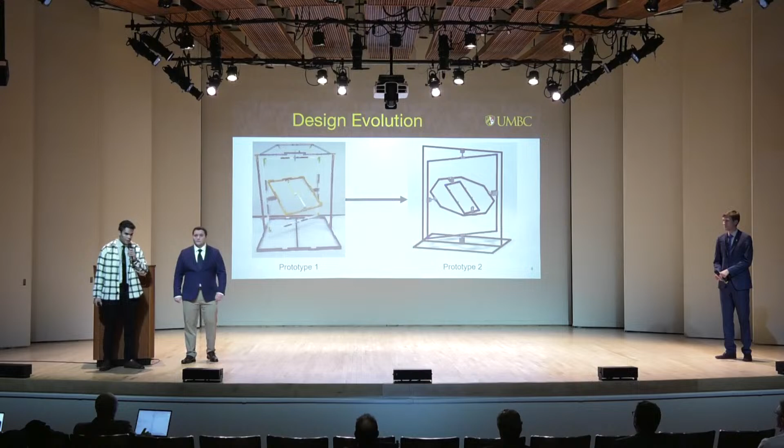Thank you, Jacob. So with this prototype 2, we then needed to run some analysis. We first wanted to understand how the motors on the quadcopter and the vibration induced by them would affect the structure. So we ran a modal analysis on a simplified model of prototype 2, simplified because without the simplifications, the program would just crash because 3 moving axes is not going to be able to work on our hardware.

We then ran a deflection analysis where we assumed that the quadcopter is perpendicular to the ground and powered at 100% thrust. There are 2 connection points to this quadcopter in the structure, and for that reason, the force is going to be distributed across those 2 points, so it's equivalent to 2 of the motors operating at 100% thrust at the top of the structure. And because of that, you see the arrows on the left 2 images. That is where we applied a load, and we ran this analysis for no support, half support, and full supports, and the images on the left are for no supports and full supports.

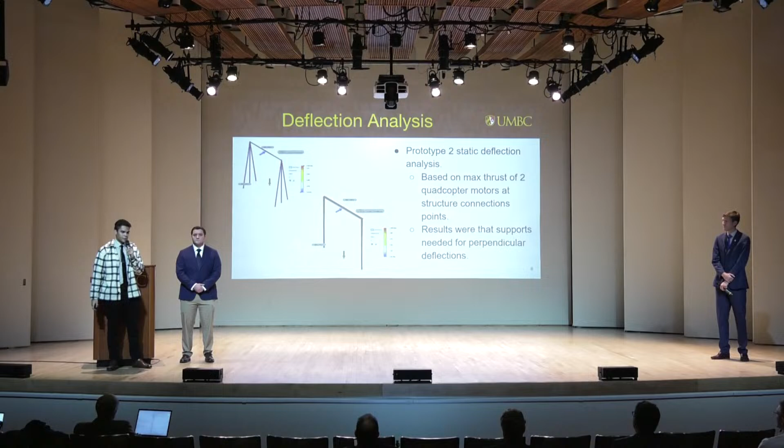So our final design consists of 3 rotating rings and an outer structure. That inner rectangular ring has 4 clamps attached to it so that we can clip the quadcopter into place for testing. That middle ring has an octagonal design in order to minimize the footprint of our device. There's also 2 interfaces between each of the rings and between the outer ring and the overall structure. So we also implemented our analysis that we did on prototype 2 by adding supports onto the structure in order to minimize deflection at the top of our device.

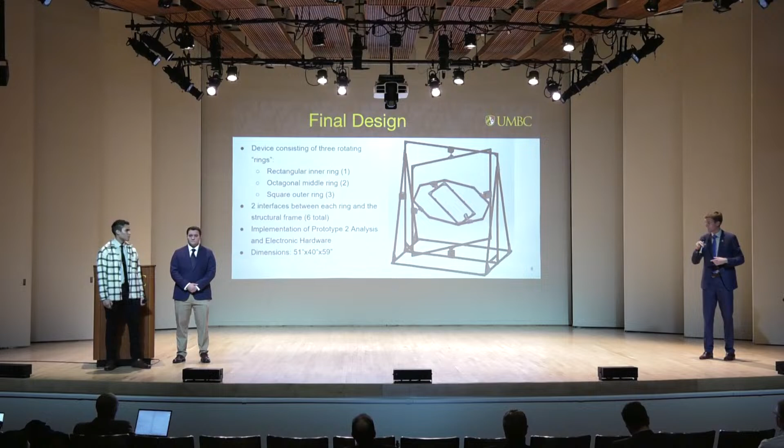And that's just creating a program that takes the encoder readings and feeds them into MATLAB to be displayed in real time. So far, we've manually maneuvered the rings in order to ensure that there's no obstructions to their rotation, also to ensure that they rotate easily and smoothly. And in the future, we plan on recording the time it takes for a user to both mount and dismount the quadcopter from our device.

So for the electronics, the big challenge faced was that Dr. Goel wanted this device to be able to spin in 360 degrees on all axes, which meant that cables were not an option, so we had to pick a slip ring. Dr. Goel has had some negative experiences with slip rings that are on the cheaper side, less than several $1,000s, in the past, so he wanted us to pick a few that were available at a budget and then run tests on them to figure out if they were going to meet the specification required. So we picked a few, tested them, and then picked the best one. It's worth noting that the one we picked performed the best, but also had gold plates on all of the contact surfaces, which is known to be good for longevity.

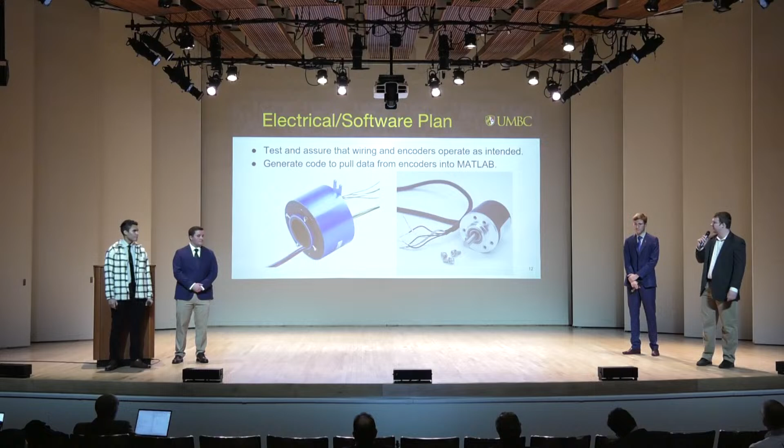Then in October, we started working on CAD models and doing prototypes like the first prototype you've seen, and really figuring out, okay, what exactly is this going to take? And then as November rolled around, we're ordering parts, we're testing parts, and we're starting to print and manufacture things. And then in the late parts of December, we're finishing manufacturing, doing all the wiring, and we're currently in the process of finishing up the software and writing all the documentation that will go along with the use of this actual device. Now we'll open up the floor to any questions.

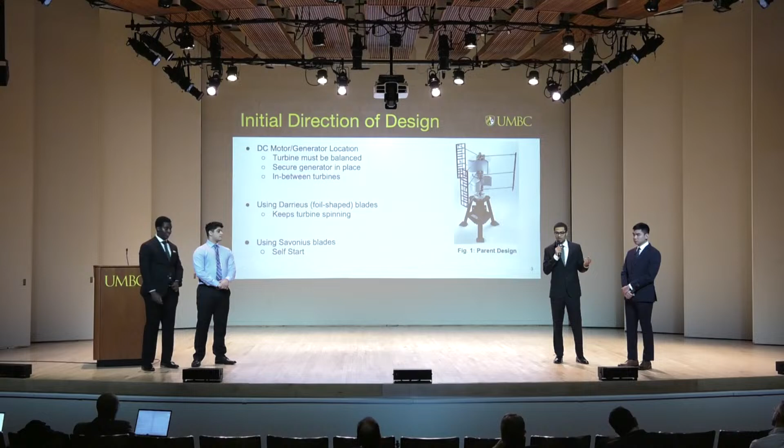So this model we're looking at here is of a previous semester's group project progress. We treated it as our visual reference because it has parts such as a Darrieus blade, which is airfoil shaped. It will keep the rotors flowing easily through the air, and Savonius blades as well that would help the system get self-started because of its cupping shape, as well as a motor that will be right between the rotors here, not only to generate, but also it will keep the full system in balance, being secured in place.

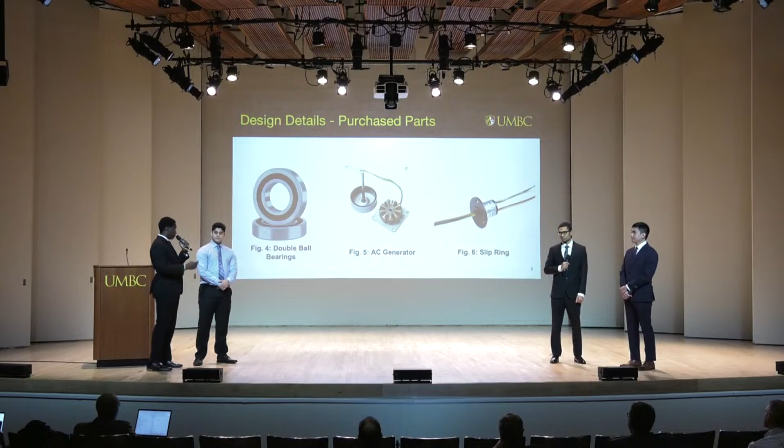other. And the theory behind this is that, according to Faraday's law, the change in magnetic flux over time, an increase in the change of magnetic flux, creates an increase in voltage. So as the rotor spins against the stator, the magnetic flux is increasing, and it's increasing the voltage. This gives us an advantage over just regular generators that have a stationary stator and a rotating rotor.

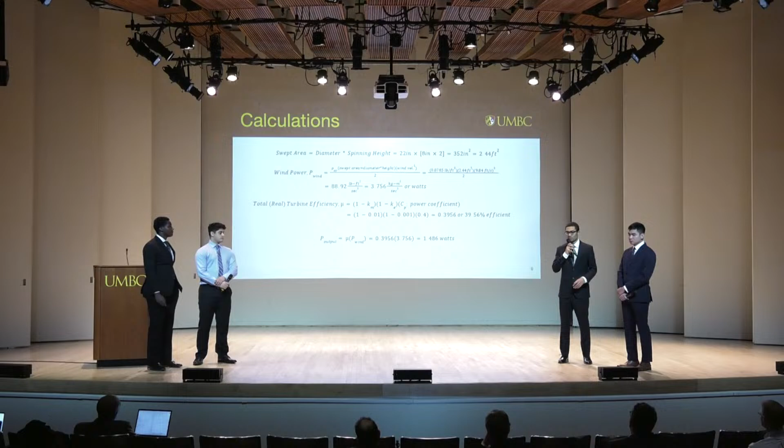With a power generated of 1.5 watts and 9.262 volts at minimum, we conducted that through a series of equations used in the next slide, where first we had to determine the swept area of our turbine as it spins, and then from there calculated the power of the wind. Separately, calculating our efficiency of 39%, which is in the range of wind turbines between 30 to 40% efficiency, and then using both to calculate for an output of 1.48 watts, rounded to 1.5 watts.

We ran simulations and analyses on our system to make sure that our parts did not fail when the system was in use. Considering most of our system is made up of 3D printed parts, once we created all of our parts, we made sure that the parts were compatible with each other, so we made sub-assemblies to make sure that they did the function that they were made to do. And with all these sub-assemblies, we created a complete system and then started testing our complete system.

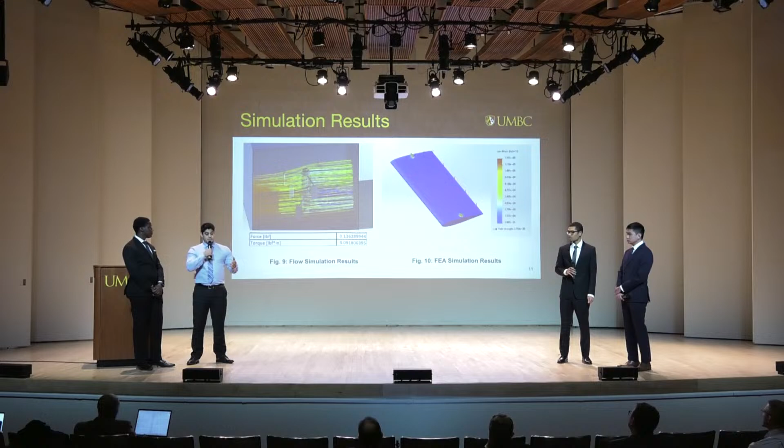We tested our system with a physical fan wall and a wind simulator in SolidWorks at a wind speed of 3 meters per second, and the voltage was recorded by using a multimeter. We also connected the wires of the system to an oscilloscope to measure the voltage versus time, and the rotational speed of the rotors about the shaft was also recorded by using a tachometer.

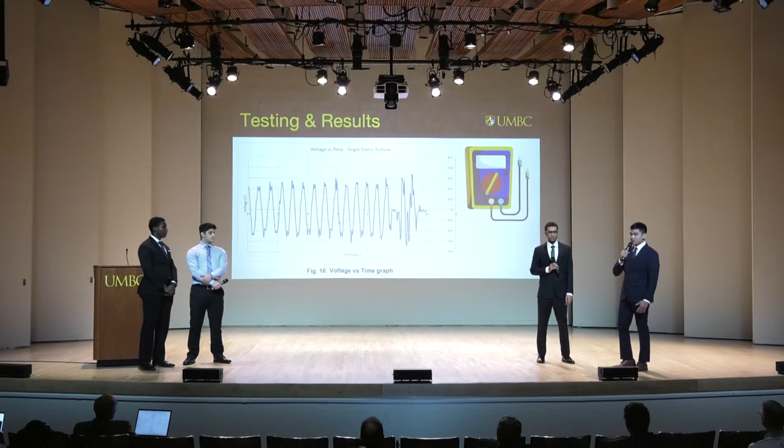Over here is a graph showing the voltage versus time that we sketched based on the data recorded from the oscilloscope. As you can see, the peak voltage is about 0.3 volt, which is much lower than expected, since our system is not fully functioning due to the wobble of the system and friction. However, we're still in the process of revising and testing.

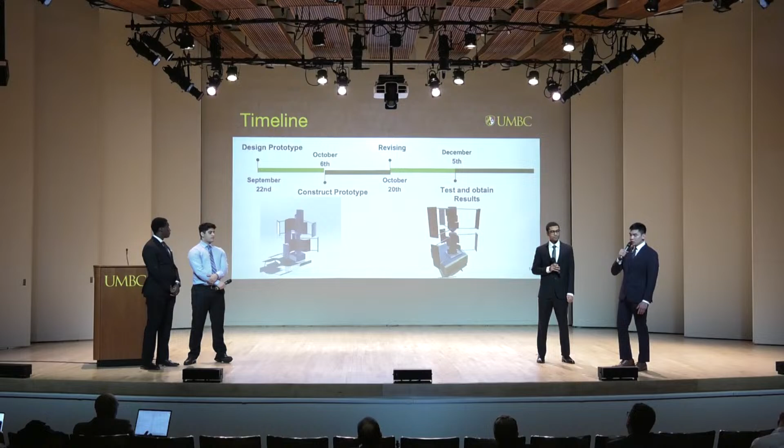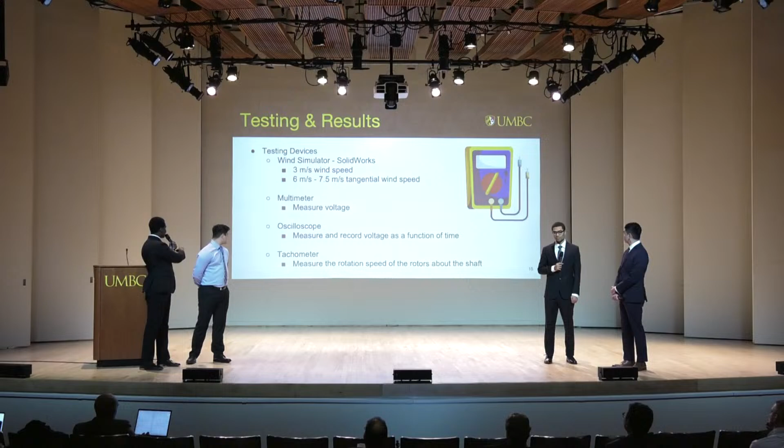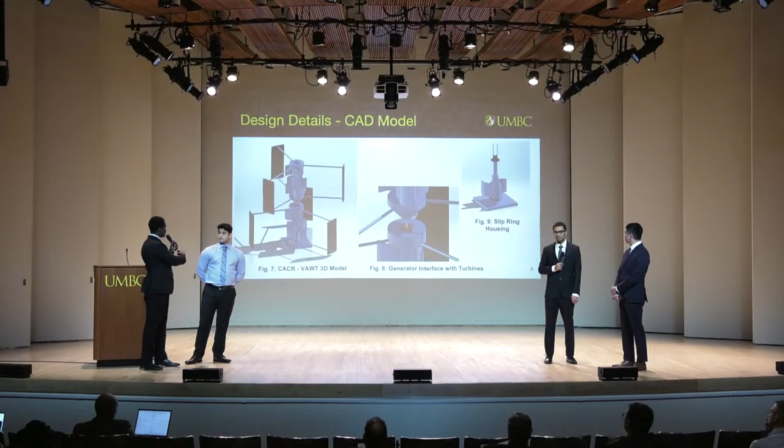The top half counter-rotating against the bottom half versus having everything rotate together. What was the purpose for that design decision? So as the top half, as shown in the motion study, counter-rotates against the bottom half, the magnetic flux of the generator is increasing, and that's supposed to create more voltage compared to if the whole thing is spinning.

Just the stator would be stationary and the rotor spinning. But now if they're spinning relative to each other, there's more voltage created. Basically, you're getting twice the RPM without a gearbox. Exactly. Yes. Okay.

And is the top half supported entirely by the motor shaft, or is there anything else supporting the top half of the structure there? So yes, initially the top half was just solely supported by that, but we found that the motor that we got, the shaft was too small, so we built an external stand that attaches to the top of the turbine and holds that part in place.

Okay, thanks. So let me ask a little bit about some of your experimental results and how they may have matched up with your modeling. You had mentioned, I think, that there was some friction and maybe some other error sources that may not have given you a good comparison. Could you allude a little more to some of those details besides just friction?

Got it. So as I said earlier, there was initially wobble due to the top turbine being solely supported by that. And because of this, when the wind hits it, the whole system is tipping back and forth. And we also found that we printed the base at the beginning of our conceptualization, and over time it started to warp. So that also caused an increase in the wobble because the ball bearing was not spinning freely and it was hitting part of the base.

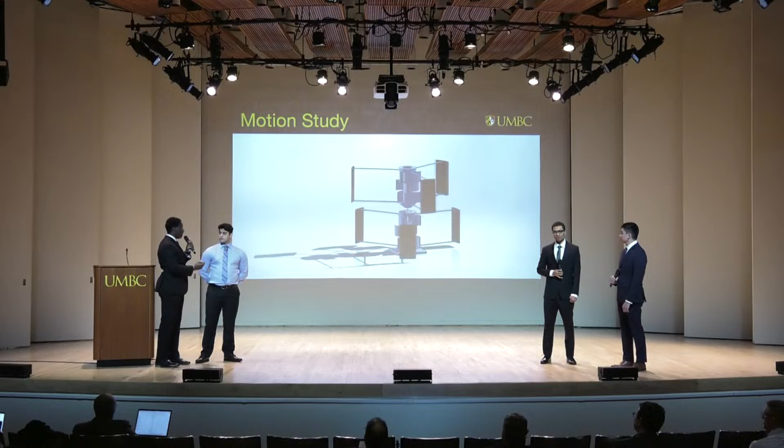So from a mechanical aspect, what would you do differently given more time and or resources? So we would get an output shaft that's much bigger that could better support the top turbine, and we were also creating that external fixture to help keep the top turbine from wobbling. We actually recently finished that, and it improved it a lot. For the base, we would not use the material that we used, which is PLA plus, because of warping, but get something more stable, such as wood, to keep it uniform and flat.

And to add to that, we wish we were able to make the radius or diameter of the Savonius blade a little bit bigger, so it can catch more wind when the wind hits the system.

All right, congratulations on your last presentation. And yeah, you can actually put this over there. All right. All right, our next team, softball. Come on out. And I think your client is here. There he is. I have an extra mic over here. Yeah, we're ready. All right.

Good morning, everyone. Welcome to our final presentation. We are Group 3, Catch and Return. I am Kyle Naughton. This is Thomas Yost, Jacob Moran, and Azana McQuanant. Our client is Assistant Athletic Director Kevin Gibbons O'Neill. He has tasked us with creating a device that allows the pitcher to practice independently from the rest of the team for the UMBC softball team. He has given us a used Pitcher Pocket Pro device to implement in our final design.

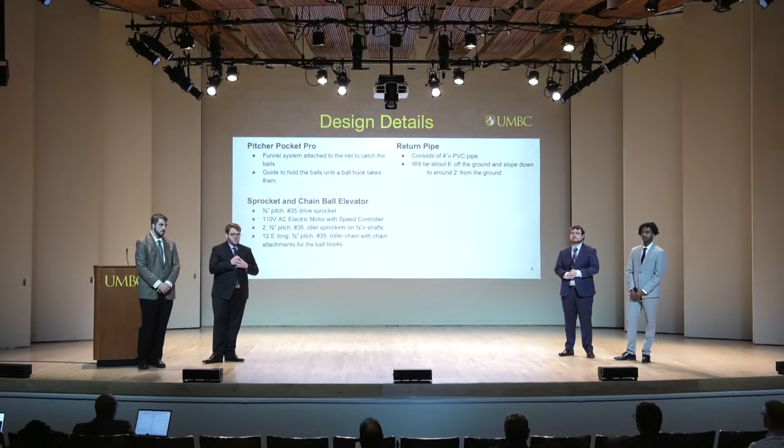We then wanted to reduce the number of moving parts, and so we considered an Archimedes screw design. We were advised that this might be a little bit more trouble than it was worth, but we still designed out the full CAD model, and we heeded that advice when it came time to prototyping. We designed a third propulsion system to get that ball up, which was an air propulsion system. It worked very well at the small scale, but when talking with the client, we found out quickly that the noise pollution of the air propulsion system would be too great when we scaled it up to the size of the softball. We moved away from air propulsion.

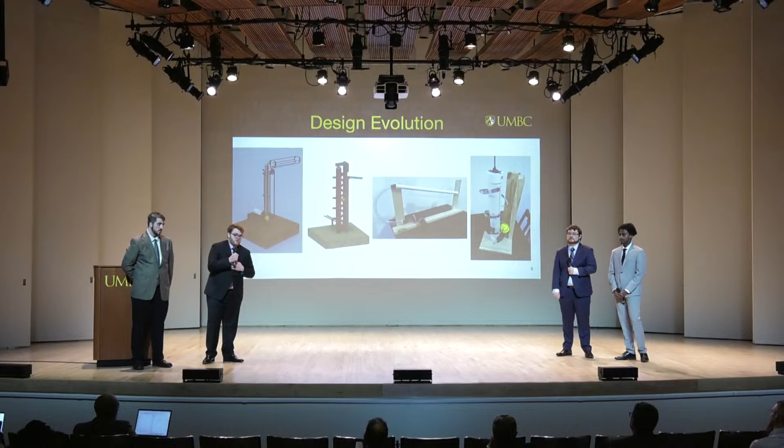We then went back to the CAD model of the Archimedes screw. We prototyped one out fully, and we ran into some trouble there. Two main issues are that the softball has a very high grip. It's designed that way to be caught and thrown. And in addition, the laces on the ball make it so that it's not perfectly spherical. These two factors make it so that a softball is almost the perfect object to jam an Archimedes screw ball lift device. Therefore, we moved back towards another design.

So for our fabrication, we currently have the ball funnel completed. We made it out of plywood and wood fasteners so that it would be very lightweight, because the Pitcher Pocket Pro is already fairly heavy. We wanted to make sure that they could move it in a timely manner. We also have the ball elevator partially completed. We have the main components of it done. We have the chain in place. We have the motor secured, and all the framing is done.

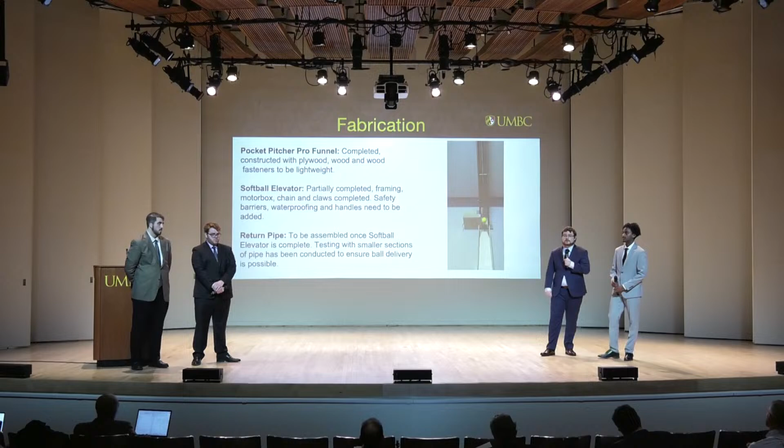Next, for our project, we had to make sure that testing was done after fabrication was completed. We wanted to make sure that the functional, performance, and safety requirements were all checked off. For our funnel system, we wanted to make sure that the ramp slope was appropriate and led to the appropriate place for the ball so that it could be picked up by the ball elevator. To do this, we simply tested how multiple balls would interact with that, roll down and sit in the appropriate location, and made adjustments as we went along.

For our ball elevator, we had to make sure it was able to lift it to the appropriate height. To test this, we simply let the system run at first and see how the balls would interact with it and made adjustments to the chain strength and slack to make sure it was able to lift it up. Basically, we saw how that worked at first and then saw how it interacted with the funnel, seeing that the ball was able to be scooped up and dropped off into the return chute, which was appropriate. We wanted to make sure that our motor was also able to shut off if necessary at any time, so we had to test a shut-off switch.

And then lastly, for our timeline, we thought of our initial concept in the beginning of October. Next, we completed prototyping in the beginning of November, and a week later, we decided on our final design. Going forward, we're going to finish the assembly on Monday, the 11th, finish testing and making adjustments on the 13th, and have our final client demo on the 15th. Thank you. Any questions?

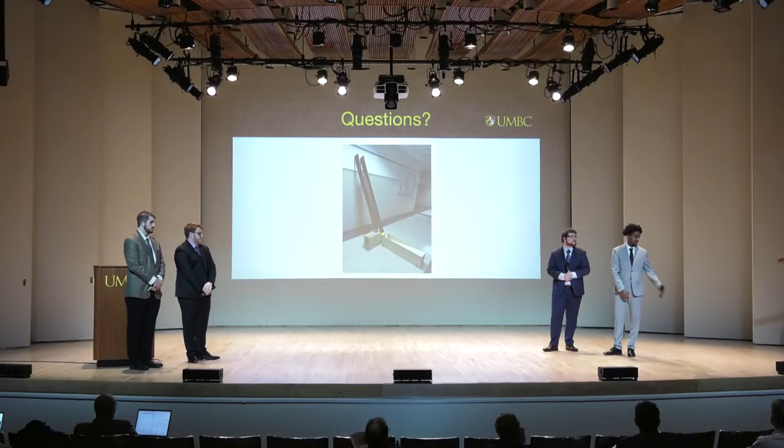Congratulations on your last presentation. Can we give him a round of applause? All right, and our next team, you want to come on out, which is our Baltimore Gas and Electric group. And I have a microphone over here. And please make sure, again, you hold your mic to your mouth.

All right, good morning, everybody. This is our presentation on our copper pipe removal tool. I'm Brandon, this is John. On your left is Daniel, and on the right is Andrew. And we've been working with BGE's gas division.

So right into the background, basically in the mid to late 1800s, BGE started burying steel gas lines in the ground to deliver natural gas to homes. And what happens when you bury unprotected steel in the ground is it starts to rust away and corrode. So in order to keep these lines in service, inside of the larger steel pipe, they inserted smaller copper pipe as liners to keep them in service.

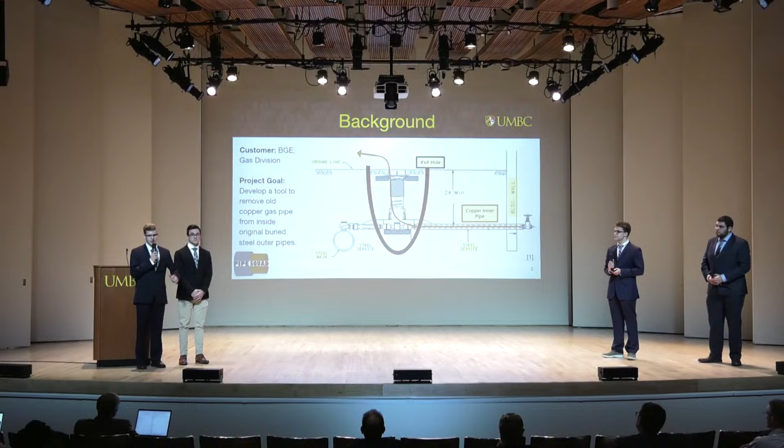And basically the problem that they're having now is that they would like to remove these copper pipes and reinstall plastic liners instead, but still inside of the steel liner. So what they need to do is find a way to remove the copper pipe while keeping the existing steel pipe in place so that they can reinstall the plastic. And they've been trying to find a tool to do this, and they haven't been able to find one, so that's where we come in.

So some of the system requirements were given to us by BGE, and some of them we came up with ourselves. BGE told us that they wanted this tool to be compatible with the Takeuchi TB240 excavator, which they frequently use for these jobs. They wanted the tool to function without the crew being inside the hole they dug, for safety purposes. We determined that the tool should be able to withstand 5,000 pounds of pulling force because the excavator can theoretically pull up to 4,100 pounds.

And 10,000 pounds of compression force because the cylinder we chose can withstand up to 3,000 psi, which translates to roughly 9,000 pounds of compression force. We wanted the tool to be compact in order to fit within the hole easily, as well as on the trucks. And then we wanted the tool to withstand the wet and muddy conditions that it would be experiencing on job sites. And then lastly, we wanted the tool to be entirely mechanical in order to save cost and make the product simple to maintain.

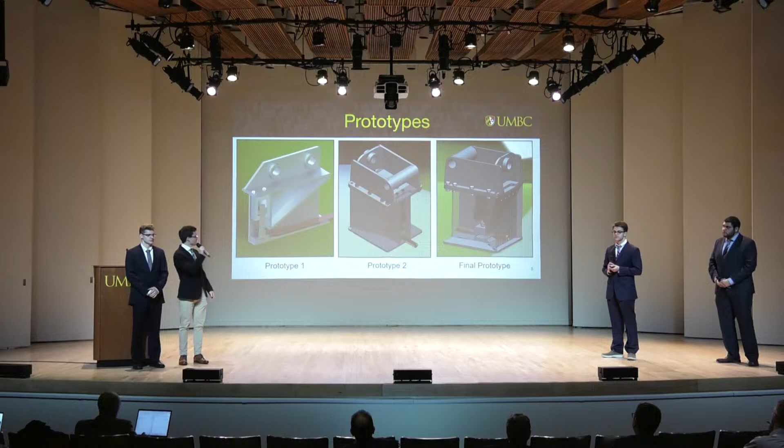So the actual clamping jaws of our tool, we initially had more of a serrated jaw design, but we were concerned about, during compression, shearing the copper itself. So at the recommendation of our professor, Dr. Von Lockett, we went with more of a smooth, wavy design, to limit the chance of shearing the pipe during compression, but also increasing the mechanical coupling rather than just flat blocks of steel. And those jaws are CNC cut out of just standard soft 1018 steel. We didn't feel we needed to harden them because it's substantial, and those are user replaceable, just bolting in.

So moving on to the aspects of safety and also the analysis that we've done with the tool. As we mentioned previously, with the final prototype we added rubber safety flaps at the recommendation of BGE to the front opening where the copper pipe goes in. This is just to make sure that nobody is putting fingers where they're not supposed to go. We also did a finite element analysis for the frame because, as mentioned earlier, the hydraulic cylinder can exert almost 9,000 pounds of compression on the tool, and also the excavator can pull with about 4,000 pounds. So we just simulated those loads in SolidWorks. This is only for the frame. That's the only part that we looked at for the finite element analysis.

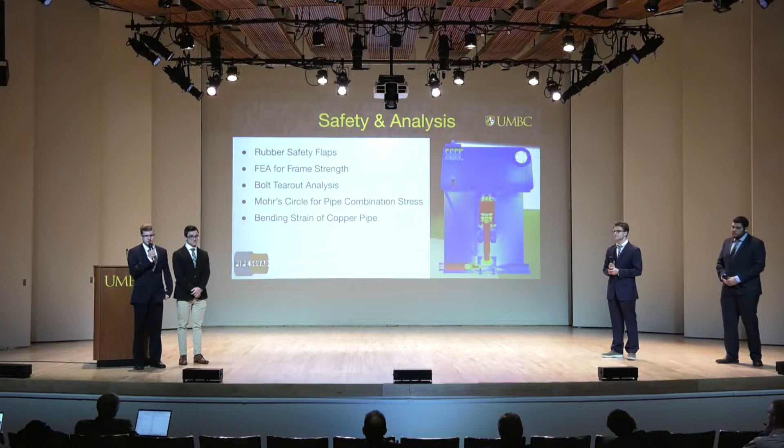The tool's about 2 feet tall and about 1 foot wide, so those plates on the side are pretty flat, and we just wanted to make sure that they were strong enough, and the factor of safety there was well over 5. And then by hand, we did an analysis of the bolts that attach the top mounting bracket to the rest of the frame, just to make sure that those weren't going to damage the steel. For the copper pipe, where it's being compressed in the jaws and the tension is being applied as you pull it out of the ground, we did Mohr's circle on that to make sure it wasn't going to fracture. And then we also looked at the strain on the copper pipe as a result of the wavy jaw design, and all of those calculations checked out, and we're happy with the performance of the tool.

All right, so for the fabrication itself, we were lucky that BG&E had a CNC fiber laser on site, so they were able to very accurately cut out our 3/8 inch plate steel, and we included tab and slots for alignment. They then took the side panels, and they had a big hydraulic press brake, and they bent those into shape, and they got that all slotted together, and then Brian the welder tacked everything up, and then went back with a stick welder to get really good penetration on all the necessary joints.

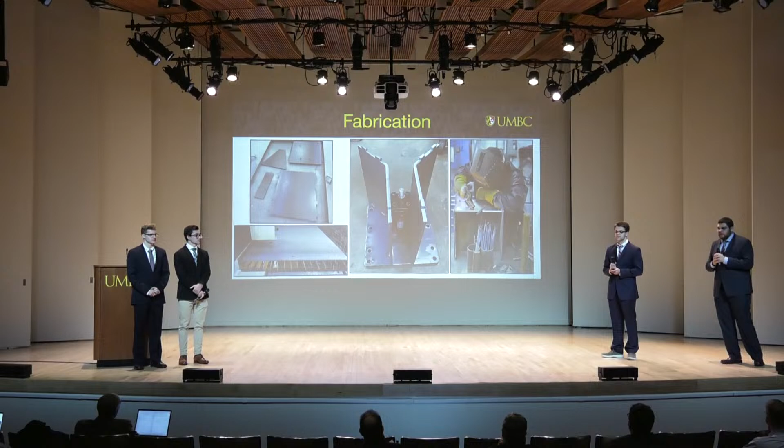So for some quick testing, we haven't done our complete round of testing yet. We actually did this yesterday. This is just some quick performance testing. So we hooked up the tool to the excavator. We wanted to make sure everything was working properly. The hydraulic cylinder works. It was able to compress the pipe. And BGE basically just took a piece of copper pipe and put a bunch of gravel on top of it and parked a big giant dump truck on top to make sure there was some resistance there.

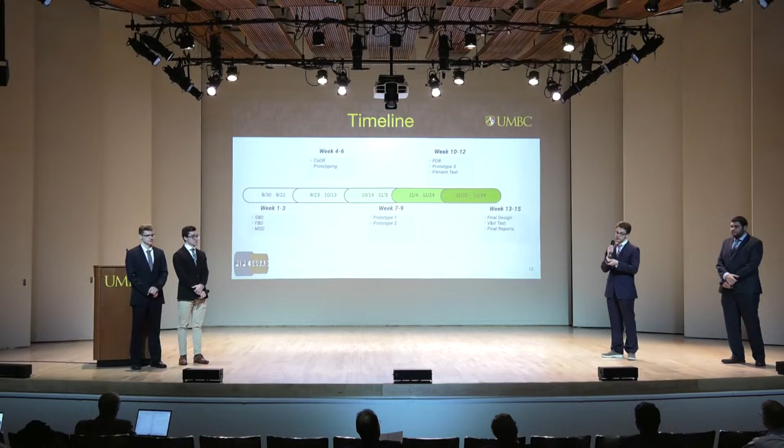Here's a broad overview of our timeline. In the first 3 weeks, we focused on understanding what BGE wanted and how the tool would function. In the second part of our project, we focused on coming up with a conceptual design. We then worked on 2 prototypes, which we presented and got feedback on. We then came up with a final design based on our feedback, and then we've just completed some of our initial testing on it. Thank you all for coming and listening to our presentation.

Does anyone have any questions? Yeah, just any considerations for the maximum length of pipe that you guys can pull out without it interfering with the work going on around it, or ways to redirect the pipe so it is not coming right back at the operator and or interfering with the boom or any of the hydraulics as the length increases? I know you guys said 20 feet, but realistically, is there a maximum that they can do before they have to cut and reset, or is there any considerations for shifting the pipe away from the operator?

Yeah, so the copper, it's not hard copper, it's like a soft coil copper. So they're only gonna pull out maybe like 4 or 5 feet at a time, however much the boom can swing. So they'll do one stroke, and as soon as it gets up towards the cab, another operator outside the hole can just direct it away. It's flexible enough, they can just push it away, and then they can just continue pulling. And then another operator can just coil it up, basically. And if they want to, they can cut it at any point. But yeah, that wasn't really an issue, just because of how flexible the pipe is.

Yeah, so I'll add to that a little bit. When we did the testing yesterday, basically, where the jaws actually crush the copper, at that point, it's very flimsy. You can bend it with your hands. So as they pulled the copper out, a guy just went behind the excavator and basically just folded it over itself into a nice little neat pile. Yeah, like an accordion.

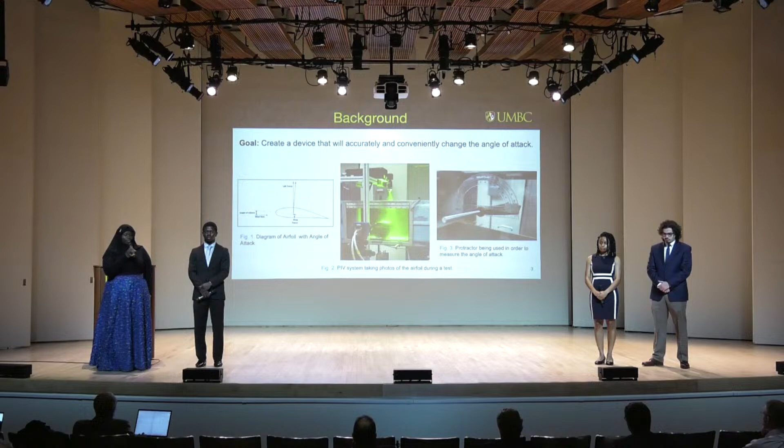Currently, the client is using a protractor to find the best angle per test. However, this leads to a lot of inaccurate measurements and is troublesome for the client. Our goal is to create a device that will accurately and conveniently change the angle of attack. We had many system requirements for this project. However, the most important one is to make sure that the device changes the angle within 0.1 degrees of tolerance.

We adopted an agile methodological approach in which our team started by conceptualizing design ideas. We moved forward by developing upon them through written documentation, sketches, and team working meetings. And once we were able to develop a prototype, we validated the device through operational and functional integrity testing, finishing off with a retrospective or evaluative meeting to ensure that we've met our desired goal.

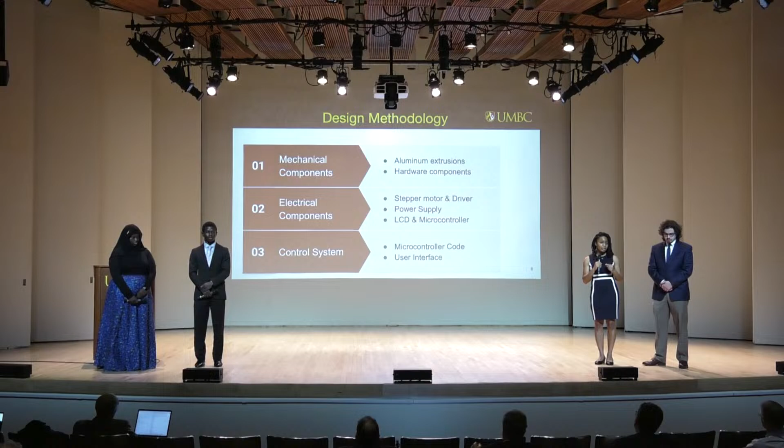We functionally broke down our product production into 3 stages, the first being mechanical components, where we developed the frame and the body of our device, moving to the electrical components, where we utilized evaluative methods to select the electronics for our device, such as the stepper motor and the stepper motor driver, and lastly, the control system, where we evaluated the interconnected aspects and functionality of the electronics, and we developed upon the user interface.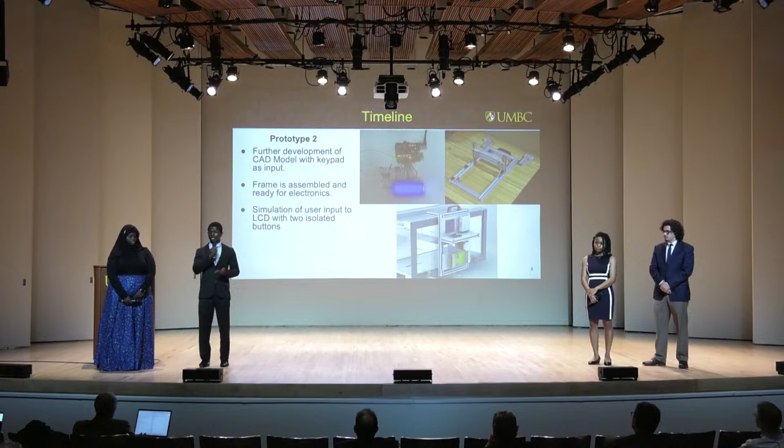From this to what would become the final product, we changed from the keypad and LCD to an LCD shield. Programming was done, as well as the final components being assembled, and then testing was done, which verified that our device was a functional product that satisfied clients' requests.

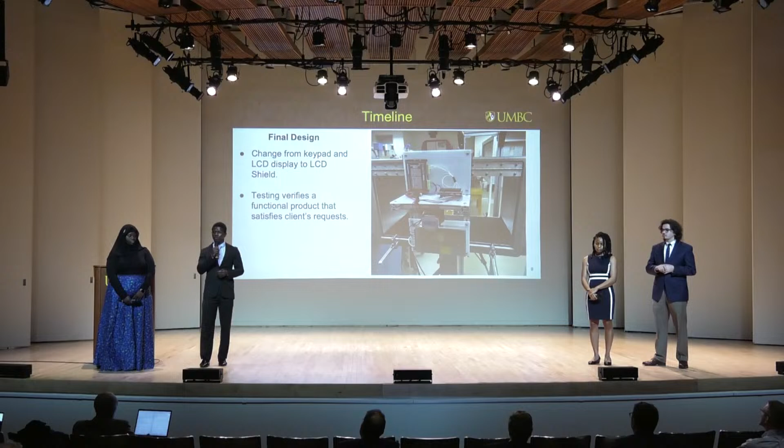Our budget followed the timeline in 3 different phases. Phase 1 included materials for the physical frame. Phase 2 included the electrical components, and Phase 3 for safety and final touches. In total, we spent $467.

Now, from ideation to prototyping and development, we would now like to feature the AeroFlex system, an actuation device capable of moving 1/10 of a degree for accurate testing of the angle of attack of the airfoil within Emily's experiment. Now, with this system, what we have outlined here is essentially just the main components that go into our product.

I do want to highlight a couple of our key features, starting with the NEMA 23 2-phase stepper motor, which we selected due to its ample holding torque that would allow us to hold the airfoil within the wind tunnel during testing, where we've decreased the step angle from 1.8 degrees or 200 pulses per revolution to 25,600 pulses per revolution in order to get as precise as possible to the 0.1 increments that we need for testing.

Here we have our user interface, which we designed to be user-centered and intuitive, in which the user is able to increment and decrement by degrees of 1 and 0.1 simply by selecting those buttons there, toggling between the buttons, and they're able to enter their desired angle of attack.

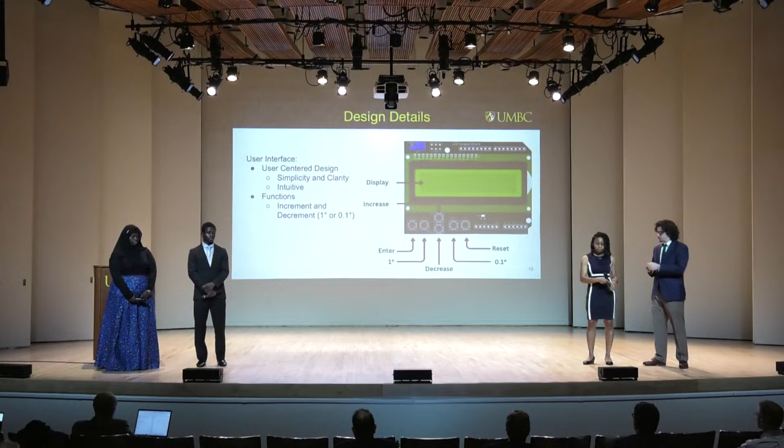So to house all of our electronic components, as well as mount the device to the wind tunnel, we chose to use the 80/20 aluminum T-slot building system. What you can see in the upper left is that aluminum extrusion. We also used various 90-degree brackets from the same company to attach all those extrusions together, and then the miscellaneous hardware required, which was T-slot nuts, machine screws, and washers. Additionally, we had a high-density polyethylene sheet laser cut to size to mount all of the electronic components, which was mounted to the frame.

On the left side, you can see the assembled frame with those aluminum extrusions cut to length using a dry cut chop saw, which allowed the lengths to be very accurate, so the frame was the expected dimensions and fit on the wind tunnel as we expected. Of course, the 80/20 system is adjustable, so if we needed to, we could adjust it to make it fit even better. On the right side, within the red circle, you can see a small aluminum block. What that does is adapt the 4-hole mounting pattern for the toggle clamp to the 2-hole pattern that is needed to mount it to the aluminum extrusion.

So you can see in the upper left image, the HDPE sheets have been mounted to the frame. Once that was done, the electronic component mounting patterns were found in their respective data sheets, drilled in those HDPE sheets, and then the components could be mounted. Once they were all secured and held in place, we then wired them together with strain relief in mind, especially the 120-volt AC power cord that leaves the device. Because the user will be handling that, it moves around a lot, so strain relief is extra important for that one.

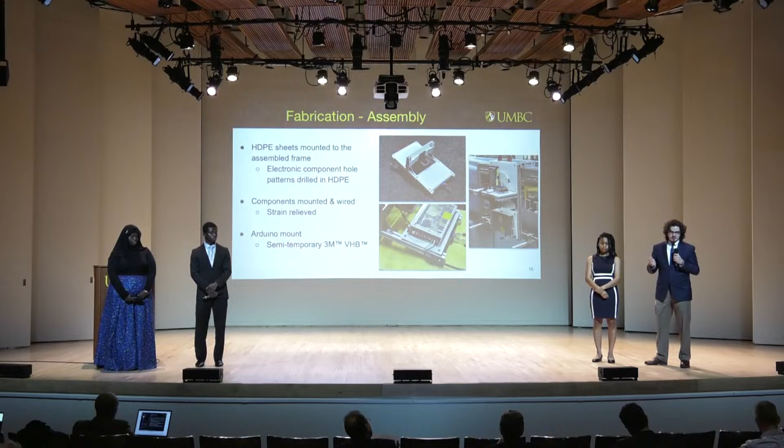Additionally, the Arduino is currently mounted using 3M VHB, which stands for very high bond, so it's very secure right now, but we think we can do better, so we're going to 3D print an enclosure for the Arduino and attach it using hardware.

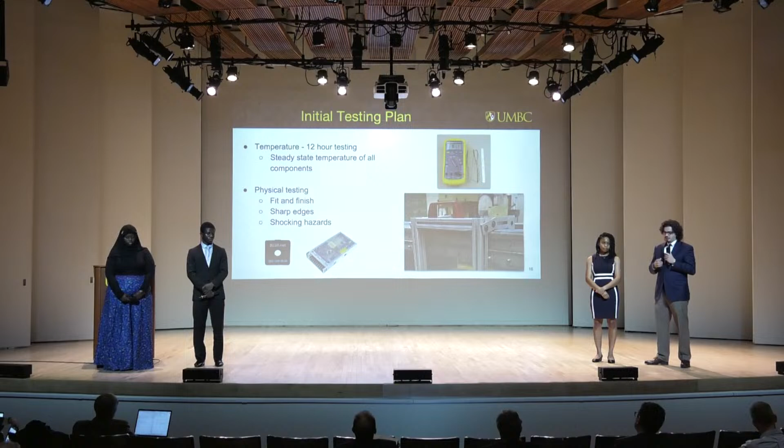So for some of those more basic system requirements, we had an initial testing plan for temperature, which was over a 12-hour period to be sure that any components on the device don't exceed a temperature that we expected when the client is using the device. And then physical testing, of course, fit and finish, making sure it fits on the wind tunnel, sharp edges for safety, and shocking hazards. So the most important system requirement was that precision, 0.1 degrees. That involves some interesting testing. The Imaging Research Center right here on campus helped us do this.

What we did was take some high-resolution images of the airfoil at different angles, starting from 0 degrees, 1/10 of a degree, 1/2 a degree, and then 1 degree. Those images were then loaded into image processing software, where we could take actual measurements of what the airfoil actually did. So the result of that is the motor rotated 0.0991 degrees when we told it to rotate 1/10 of a degree. That's a difference of 9/10,000ths of a degree, or 0.9% error, which is excellent.

And then for those other system requirements, the temperature, we found the stepper motor was the hottest device, and that reached 117 degrees, which is barely above warm, so there's no danger there. Physical testing, it fit very rigid, as you can see in the bottom video there. All the edges were made sure there were no burrs or any sharp edges.

The shocking hazard will need to be addressed because that power supply has some exposed terminals where the 120-volt power cord attaches to it. So to address that, we're just going to 3D print a cover that will cover those terminals. And that's all we have for you. So any questions?

Thank you. I appreciate the consideration for putting together a package like this. You did mention something about your accuracy. And my first question as you were going through this was mounting accuracy. So in other words, how do you know when 0 is 0? There's an increment as you've prescribed, and I know you mentioned there's an error there. I'd like you to offer a reason why there's an error between the increments of what you prescribed and what you actually saw. And then I'm also going to ask about how you can mount it and make sure that 0 is 0.

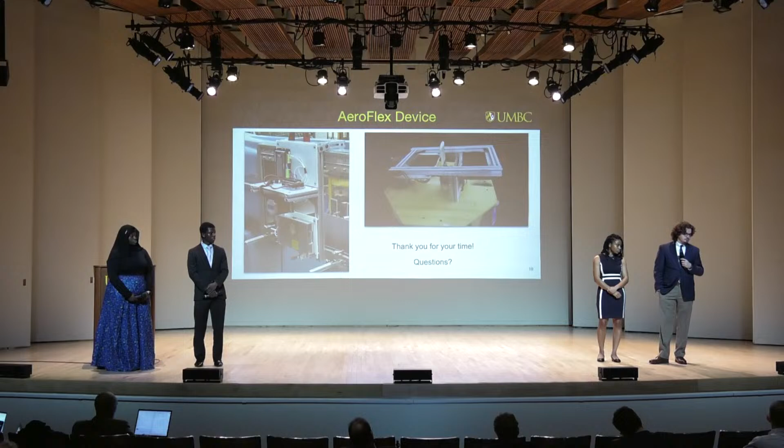How are you securing the airfoil and attaching the airfoil to the stepper motor? And the reason I'm asking that question is, is there any concern over time that that connection could potentially slip, where the motor itself and your measuring device show that the shaft is at 0 degrees, but because of slippage in the connection between the foil and the shaft of the motor, over time the airfoil itself is not at 0 degrees anymore?

That's an excellent question. We actually considered that by using an encoder on the shaft. We didn't do that because it would add an extra level of complexity that we didn't think we needed yet. In the future, we could add that. Right now, the airfoil is on 2 axles out of each end of the airfoil, and on each side of the wind tunnel, there's a plexiglass window with a bushing and a hole in a bushing that the axles go

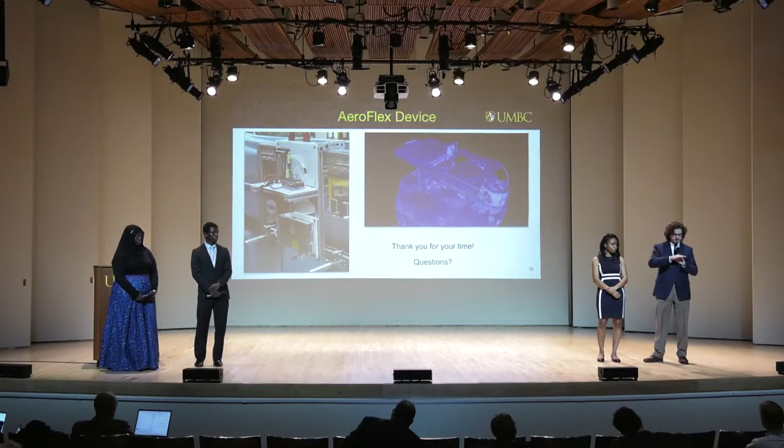through. So that is what's supporting the airfoil, and the only thing the stepper motor is doing is attached to one of those shafts using a shaft coupler. It has a set screw, and it's a D-slot shaft, or it has a flat spot on the shaft that the set screw pushes against, so it's pretty much impossible for it to rotate unexpectedly. Okay.

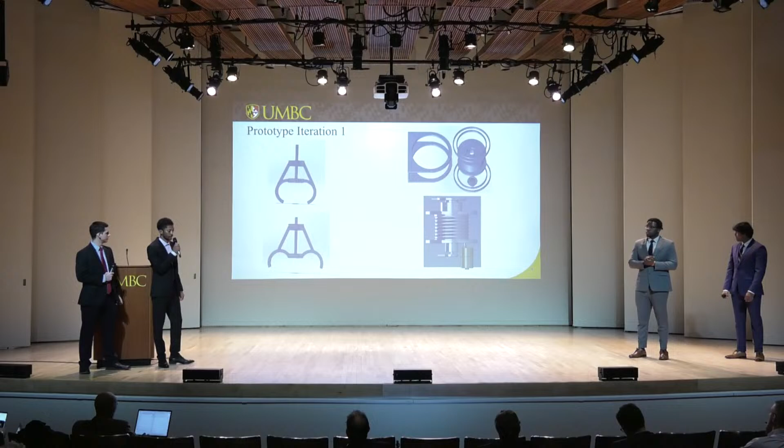For our second prototype, we redesigned the claw to make it simpler and have a pinch mechanism, and it houses a motor on the top connected to a threaded shaft that would open and close the claw, and on the right is an updated winch. What you're seeing here is a 3D printed model of our second prototype for the winch. The purpose of this was to test out the functionality of the 3/8 grooving to house the 3/8 cable.

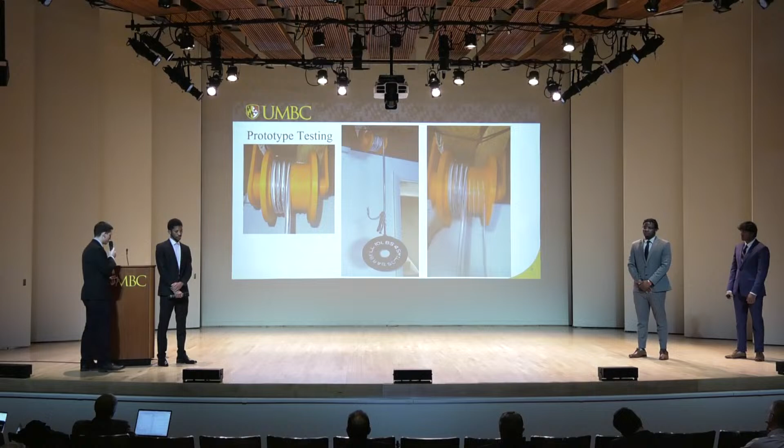As you can see, it's bolted to the ceiling of my basement. It ended up working pretty well. In the middle, we have a 10-pound weight suspended on the cable assembly, demonstrating that it could hold a weight that is almost twice the max weight of the entire assembly. And on the right, we have a video of the cable unspooling.

Here is the final design. We have a DC motor driving gears. The DC motor goes into a gearbox with a worm drive gear, which provides an increase of torque, but also locks the assembly so that the operator can choose how much cable they'd like to have dispensed. In the top right corner is a slip ring, because unlike traditional winches, this is designed to have electrical signals so that you could use an electric claw or have extra attachments.

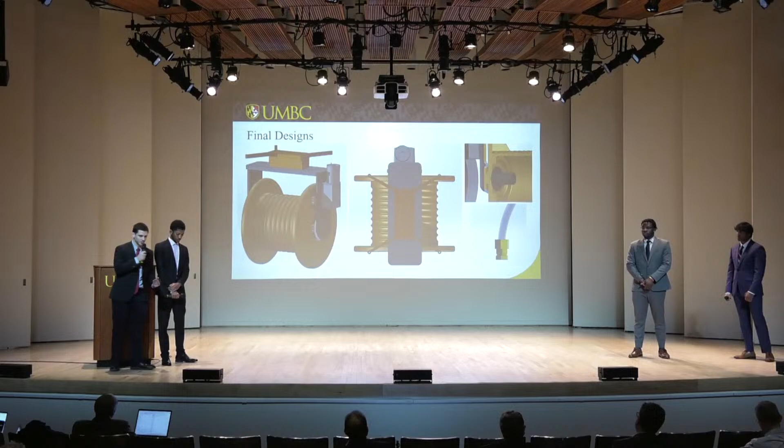Below that is a CAD model of the 3/8 nylon tube. It's going to house 3 17-gauge cables, which will allow us to transmit 1.5 amps over a distance of 9 feet without any voltage drop. Our latest solution for our claw was purchased via a third party, and to still meet the requirement for non-conductive materials, we are going to put shrink wrap insulation over it.

And in the middle, you can see a CAD model of this claw, and it has a max clamping force of 1.5 pounds. And on the right is the tube with the coupler that will be attached to the top of the claw. The last piece of the puzzle with this project is getting the electronics to integrate with the drone. DJI provides a payload development kit that allows us to utilize their proprietary interface called Skyport.

It is the circular interface that provides a 24-volt connection as well as a data transmission. It breaks out to this black PCB board, which has Ethernet capabilities as well as voltage. However, the voltage that the development board gives out is not great for applications, so we have a few DC to DC converters to get 7.4 volts for the claw, 5 volts for the Raspberry Pi, and 12 volts for the winch motor. The Raspberry Pi is going to connect to a serial converter in order to establish a connection with the DJI Skyport interface.

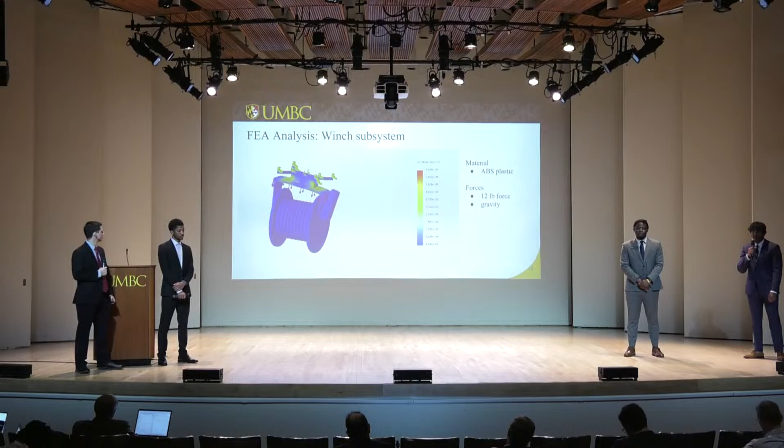And also we have an H driver to control the speed and direction of the winch motor. To the right, we have an in-depth picture of the nylon tubing with a 17-gauge wire. This is the first FEA of the winch subsystem. This is made entirely of ABS plastic, and it was tested with 12 pounds, which is double the expected weight for it. Now, the yield strength for ABS is double the magnitude of anything this would experience as measured in SolidWorks.

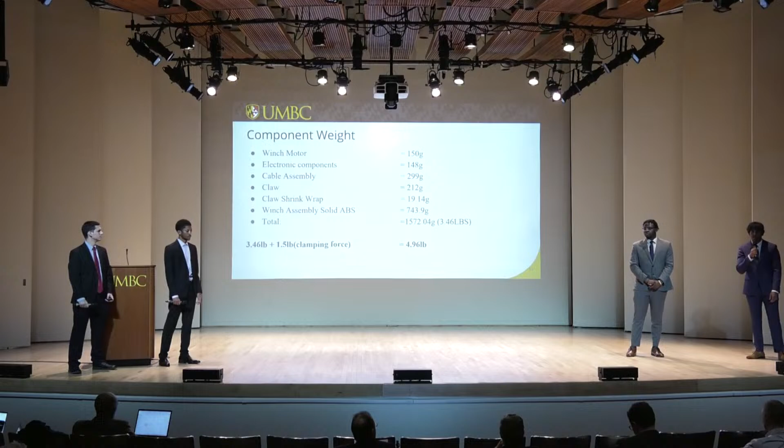So for the testing we've done so far, like Esru spoke on, we did the FEA for the winch, the bracket, and for the control board. And we also did cable strength testing. And one thing that was kind of important is that the maximum strength that was necessary was 6 pounds, but we were able to get the cable to be 25 pounds, so we tested it really well.

For future testing, we have to test the claw, winch, and the control board with the Skyport, because that's basically the brain of the drone. So the final things we have to do are the final assembly, which is putting everything together, scheduling our demo, and making our final report. And that will complete our project. Any questions?

So do you have a drone to test with? So what did you say? Do you have a drone to test with? Yes, okay. So the drone is only at BGE. It's a $10,000 drone, so we're not really allowed to access it at every point in time. But because of that, we're going to be going to BGE very soon to test the drone with all the attachments that we made with the Skyport as well. Okay. Thanks.

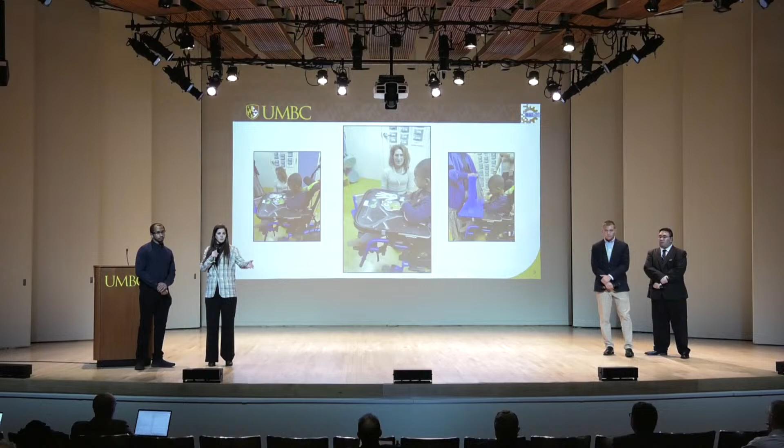These are some photos of Kage and a brief video that shows how he interacts with basically any toy. It shows a beanbag, but he will throw just about anything. So ideally, we want to find a way to secure these toys to his wheelchair tray.

For our next design, we had the idea of these rubber grips that would collapse around the base of any of his toys. With this design, we would be limited to placing toys only on the front edge of the tray, and we felt a simpler design was necessary.

Our second prototype uses a tray provided to us by Kage's physical therapist. It uses these locking suction cups to move the holding system anywhere on the tray easily. We decided not to go with the retractable reel system because we figured that its performance would be a little unpredictable, and we felt that the toys could fly back in Kage's face, or the cord could wrap around his arm and pose a safety concern like that.

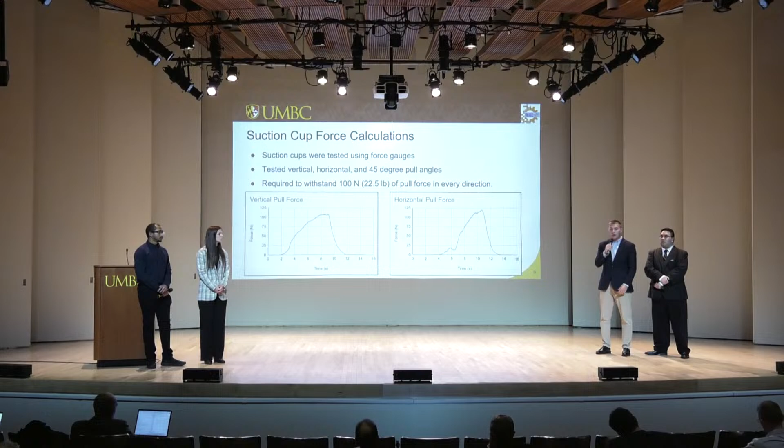Next, moving into some of the materials, we use plexiglass. This is perfect for the suction cups. It's a non-porous material, and instead of wood like his previous chair, plexiglass would be able to wash off materials and different stuff like food. This was definitely a concern from the physical therapist as well. Next, with the toy holder bungee system, these are silicone safety straps. With all these materials, we made sure they were within ASTM standards, which we have a long list of.

Then we moved into our toy suction cup stand. We made sure the suction cups were good. We made sure they were, well, not cheaper, but a satisfactory material that they could repurchase later down the line. We also did the 3D printed connectors at different heights, from 1.5 inches to 3.5 inches, and then the smaller pieces being from 1.5 down to the bottom of his tray.

And then the modified C-clamps, we put a different friction material covering the metal pieces that he could be in contact with. And finally, we had a buckle to wrap around the back of the wheelchair to ensure it didn't come off when he's going to be using it.

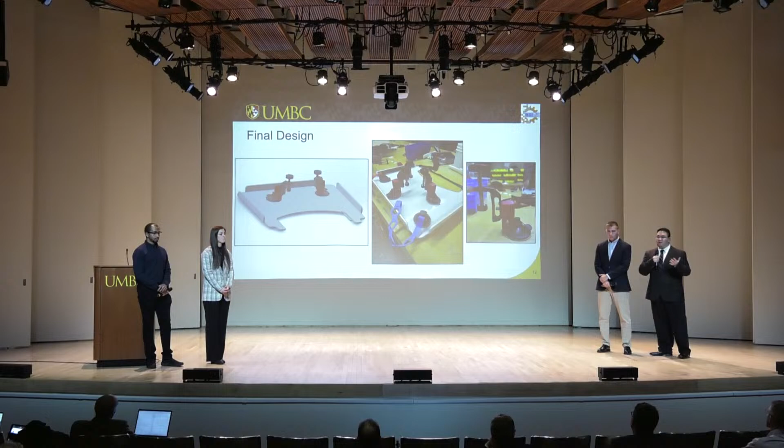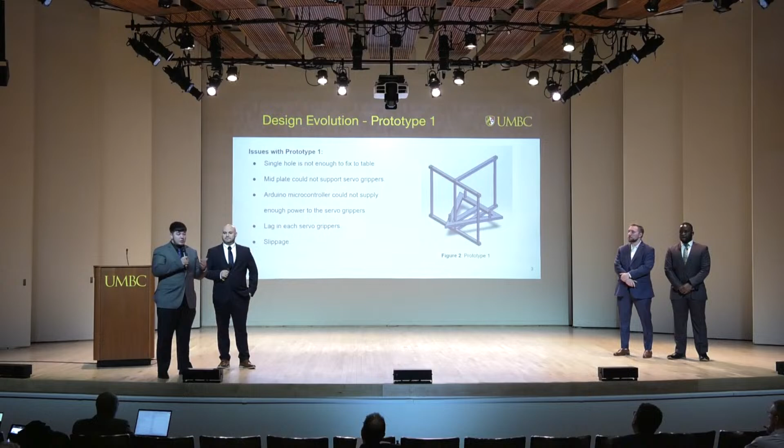So the image on the left is our final CAD model. As you can see, we made the holes for our bolts and nuts so we can attach the servo grippers to the base. And then we attach a channel on the side of the base so we were able to attach that base into the workbench. On the figure on the right, you can see our prototype in person. That's the location for the servo grippers and the frame.

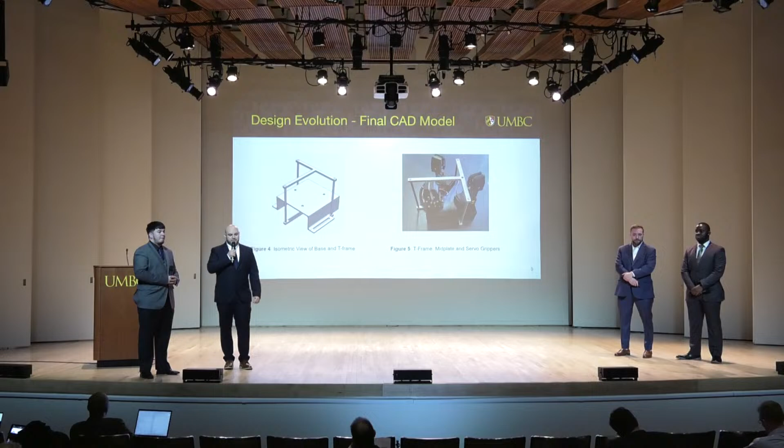To see if the frame and the base was gonna hold up, we ran an FEA analysis. The picture on the left is the T-frame. We added about a pound of force, because when we compress the tensegrity structure down, it makes about a pound of force into the T-frame. So we ran the FEA analysis, and we're way below our yield strength, so our T-frame was gonna hold up. The same concept on the right, we ran it with about a pound and a half, which was the total weight of the servo grippers, into the plate.

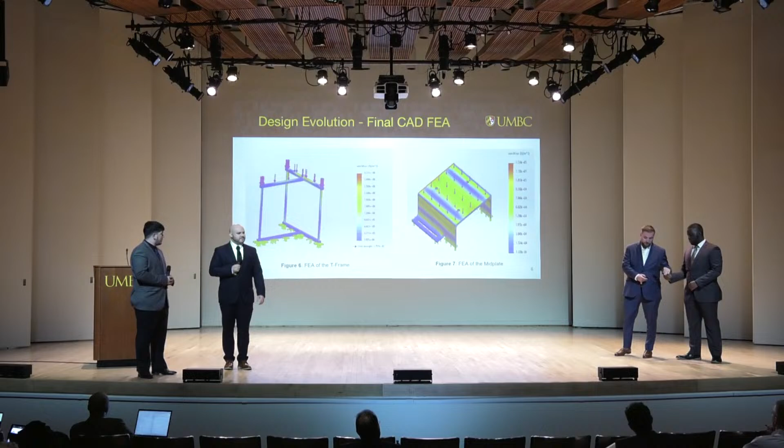So for the construction of our device, starting with the frame, we ended up going with 1060 aluminum. For the mid plate, the electronics housing, and the control knob, we printed those out of PLA+. Additionally, the Arduino and the 3 servo motors run off of a 9-volt parallel circuit. And the control of the servo grippers themselves is accomplished with a 10K potentiometer. Also, in the device, we employ a prototyping board to help make the connections a little more rigid and to aid in any future part replacement that may occur.

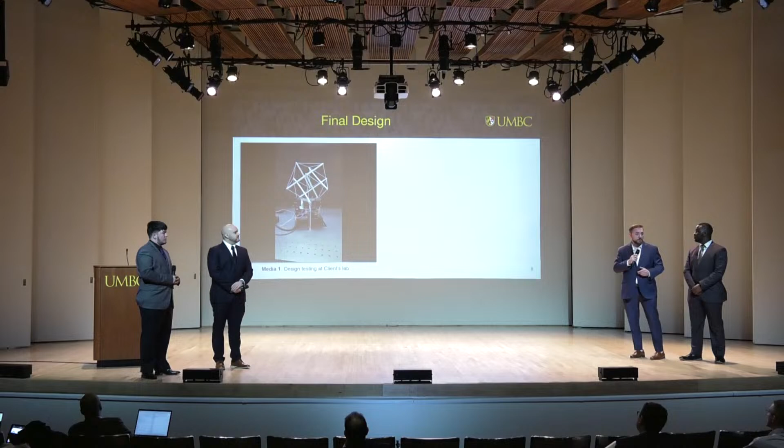During testing, we also needed to figure out the precise location for the tensegrity structures on the mid plate, as well as how to hold the tensegrity structure at the right point, as well as the position to drill the holes in the mid plate so we can attach the grippers to the mid plate.

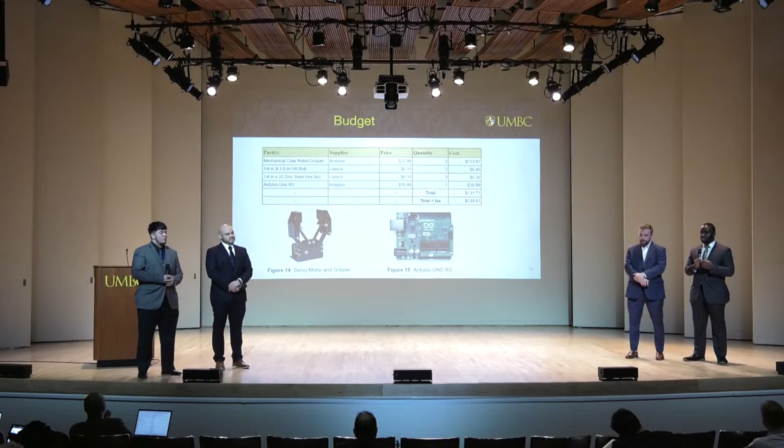So here is just a breakdown of the timeline of the entire project. We started the project in September after meeting our client. We had a few brainstorming ideas and what we needed to do to ensure that we had the right idea and the right approach for our product. In October, we started our first prototype and developed it, and in the middle of October, we had a second prototype developed. We had some setback in meeting up with schedules because we had a delay in our products being

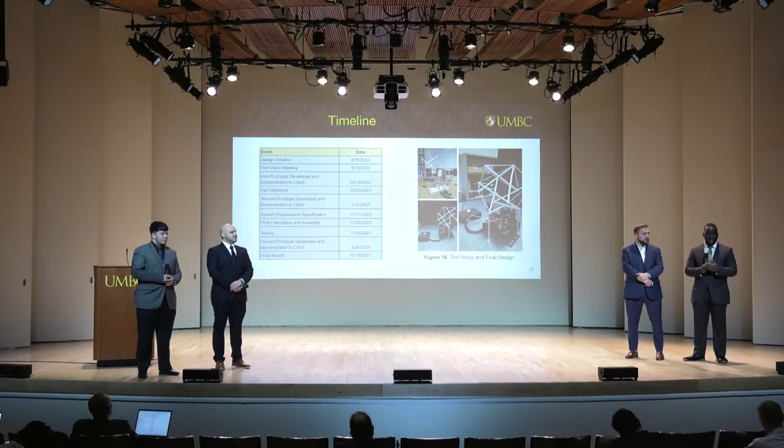delivered, but in November, we started testing, and we were able to get back on schedule just right before the Thanksgiving break. After the Thanksgiving break, we've been up to schedule. We've had a test meeting with our client, and now we're on schedule to have this project completed on the final due date. Any questions?

Could you describe how the device actually holds the structure in its flattened form? Yes, if we can go back to... So if you can see here, once the tensegrity structure is manually compressed by our client, the servo grippers will be adjusted with a potentiometer. This will hold the servo grippers in place. We attached a Velcro clip just to avoid slippage because that was an issue in our first prototype. So once the client is ready to test in his lab, you can adjust the potentiometer just a little bit and it should freely deploy the tensegrity structure.

Okay, and then the delay, did you measure the delay any more precisely than it's effectively immediate? Is that so important? Yeah, that's part of our testing in the upcoming weeks. We're still measuring the time delay of the servo grippers into the structure.

Okay. I guess it's probably important that all three release at the same time. Do you have a way of determining if that happened or not, or how close they are? Yeah, we'll be using high-speed cameras to try to capture the moment as the servo grippers open. That way we can account for the delay to see what the performance is on them. Okay, thanks.

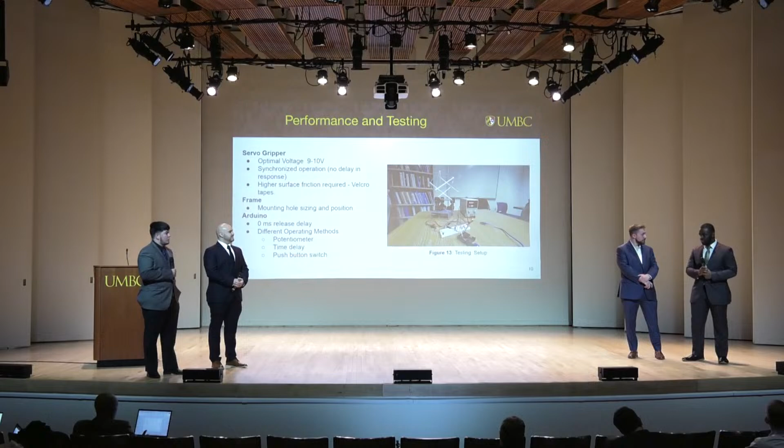Congratulations on your final presentation. You also got some shout outs too. All right. Team number 9, Kinetic Sculpture.

Hi, my name is John Dixon Burke. I'm CJ Escobar. And I'm Jillian Taylor, and we are MC Hammerhead, and this is our final presentation. So a little bit of background on our project. We've been working with Dr. Stephen McAlpine, who works with the INDS department here at UMBC, and we're working on the MC Hammerhead Kinetic Sculpture, which competes in the Baltimore Kinetic Sculpture Race every year. This race has both land and water components, so our job has been to redesign the rudder system for the water component of this competition.

So just some issues with the previous design were that it didn't actually turn the structure in water, and it was powered by a pulley system that would interfere with the existing sculpture components. In addition, the connection between the front two tricycles, trikes 1 and 2, had collapsed in a previous competition, so we had to take that into account as well. And a little bit about our key requirements. Obviously, we want the rudders to turn the sculpture left and right. And we also don't want the components to interfere with the sculpture. And we also would like for the components to be primarily upcycled or recycled, but we can use new materials as well.

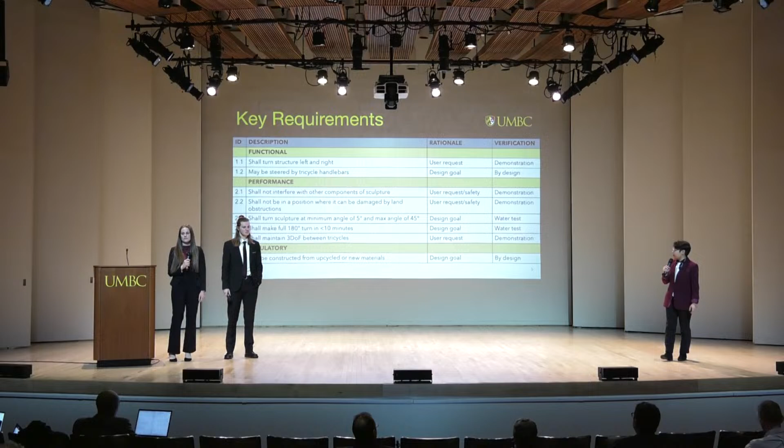So our final system at a glance, we have 3 main areas of design. We have the redesigned connection point, the front rudder system, and the back rudder system. Because the tricycles are a segmented design, it's not a single solid structure, we're not confident in the ability of a single back rudder to properly turn the device around, so we implemented the front rudder system as a form of course correction.

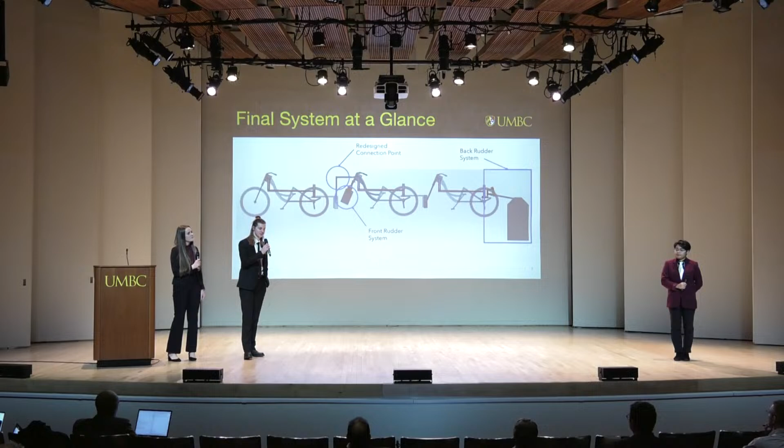The rudder shapes, we originally went with a NACA 0012 airfoil shape. However, during our analysis and testing, we discovered that the shape of the rudder wasn't really affecting our abilities, just due to the slow speed. We're moving at less than ½ meter per second. So the rudders act more as drag paddles than an actual streamline rudder.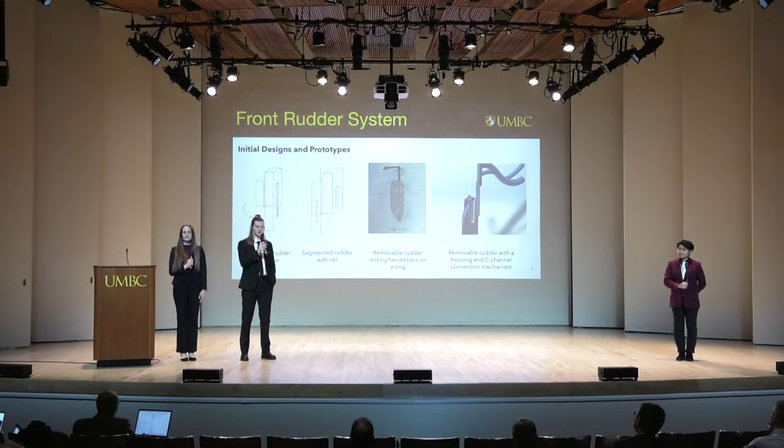So for the front rudder system, we have a few of our initial designs and prototypes, and finally we settled on a removable front rudder that uses a C-channel connection system that the pilot can reach down and pull up. So now we have our final design here. You can see the handle that the pilot can reach down and remove. The entire structure is welded together through that tube, and then it is attached to the handlebars up above. This makes it so the pilot can steer the rudder using the handlebars itself once they insert it.

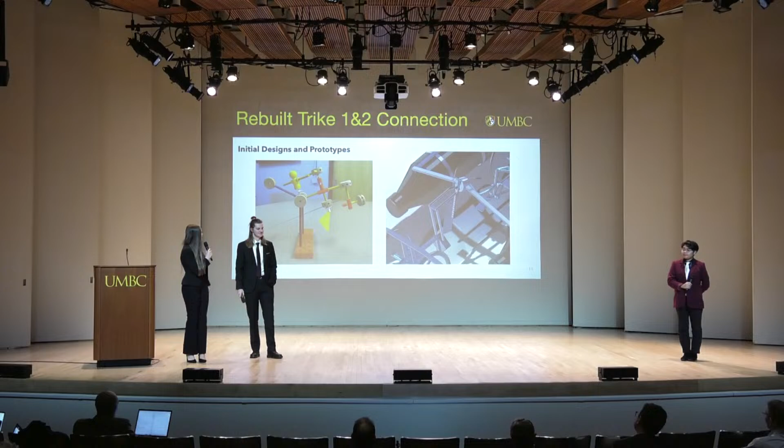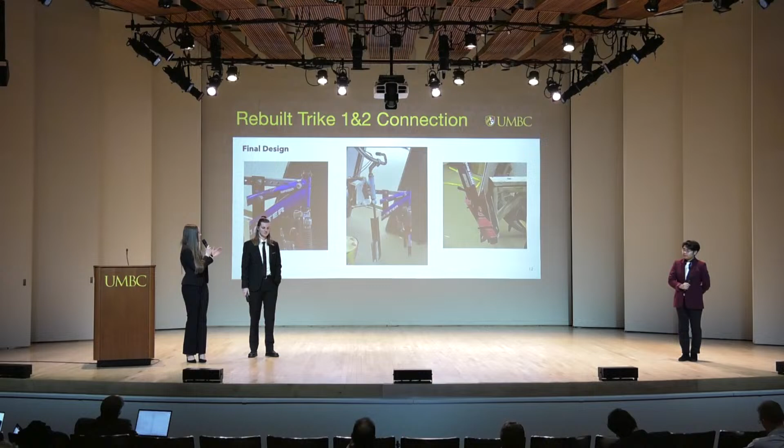So the next thing that we needed to consider was the connection between tricycles 1 and 2. We had a few low and high fidelity models that helped us arrive at our final design. We needed to consider how to create more room for this front rudder system. So we ended up utilizing the front of an upcycled suspension bike. We figured that this would better absorb the shock when they have the water impact and also remain movable in the rotational directions that Dr. McAlpine initially had designed for. And we connected this to Trike 2 by welding a steel strut to Trike 2 and bolting these components to that strut.

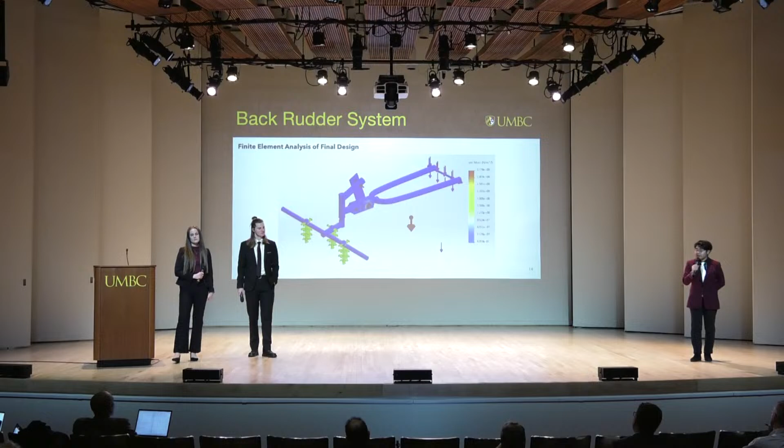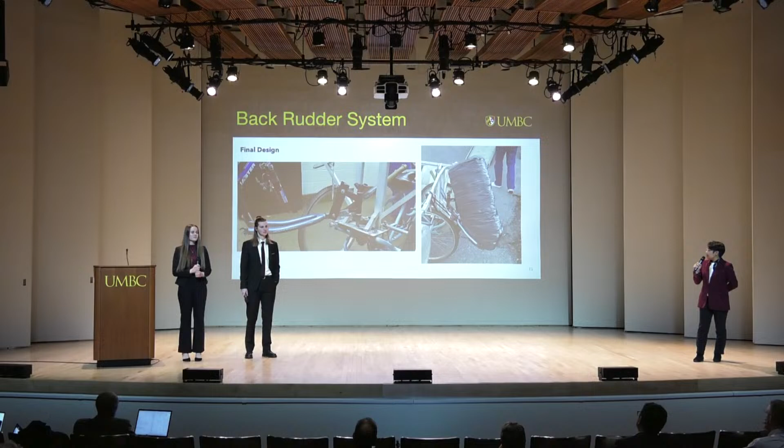So next, to go into our fabrication, we worked in the INDS makerspace, which had available to us a lot of recycled spare bike parts, pieces of metal, and scrap hardware. And due to the nature of the competition being really focused on recycling, we prioritized using these materials as much as we could and minimizing the amount of materials that we were purchasing. We did most of our work by hand, other than a few welds that were done by a professional welder, and we used tools like an angle grinder, reciprocating saw, and some power drills.

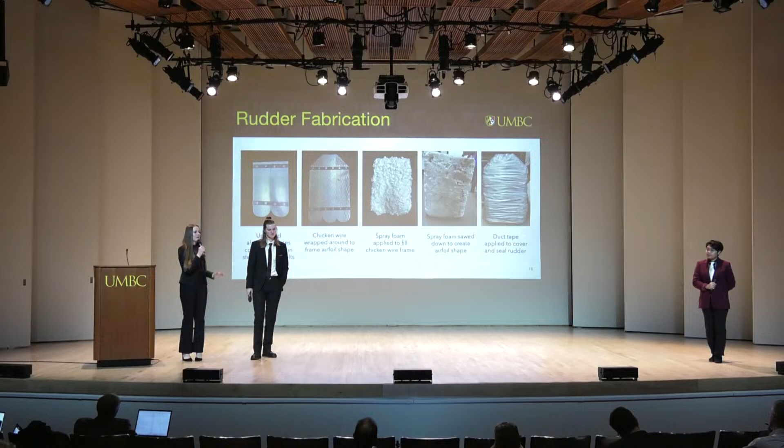And for our rudders, we ended up having an aluminum core that was upcycled aluminum plates connected together by steel bars and bolts, and then we wrapped chicken wire around this to create a frame for the airfoil, filled this with spray foam, and then shaved it down to create the airfoil shape, and covered both of them in duct tape to seal them off.

Yes, so for our testing, we first did a few land tests to ensure that our deployment of both of our rudders was successful and they could be steered by their respective handlebars, and these worked. And then we went on to do water testing, in which our first test, we got into the water and realized that despite researching that our foam would not float, it caused the rudders to float.

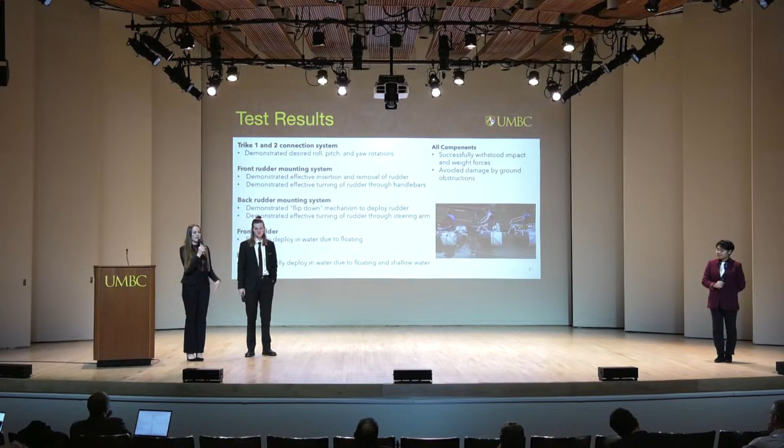So we exited the water and tried to strip as much of this foam as we could, and then went back in. And the front rudder was not able to deploy due to it still floating, but the back rudder actually did deploy about halfway, and that was effective enough to give us a very sharp 180-degree turn, which was successful. And we also were able to have all of our connection points maintain their shape in the face of the impacts.

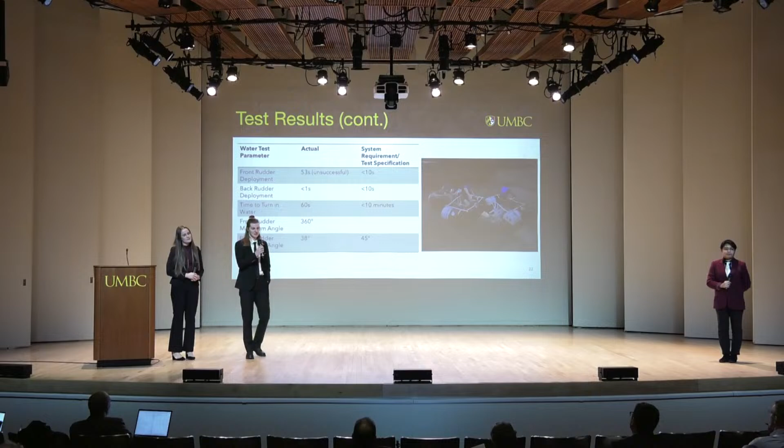We weren't allowed to use any electronic components. Everything had to be mechanical. There's also an emphasis on ecology and not using materials that would pollute the water. And then also just in terms of design constraints total, we're working within an already established system. Certain things cannot be changed, like the trikes themselves all have to be able to rotate freely about one another. So that was one of the reasons behind the difficulties redesigning the connection point, because we needed space for that new rudder. Thank you.

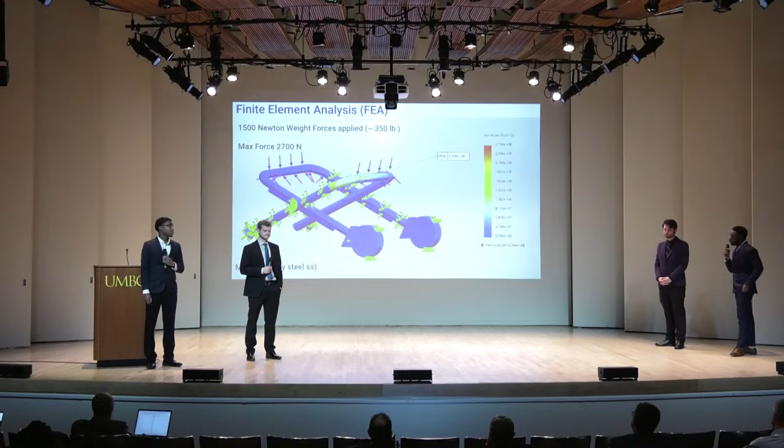Next. So the main frame of the stool is a modified prefabricated frame called the Everywhere chair that's made of steel. The original Velcro straps were removed from their original positions and repurposed to become a locking mechanism when the stool is in its folded up position. In order to compensate for the extra height added by the wheels, 2 of the chair legs had their rubber stopper removed and some of the length was cut back using a pipe cutter. The original tabs on the frame were cut and filed smooth to prevent both user injury and tearing of the fabric.

The seat of the stool is made of 420D Robic ripstop nylon. 4 layers of the fabric were cut and sewn together, and holes were drilled directly into the frame of the chair where the fabric was attached using 3/16-inch aluminum rivets, 4 per side for a total of 8 rivets. We also used 3/4-inch washers to prevent further ripping of the fabric.

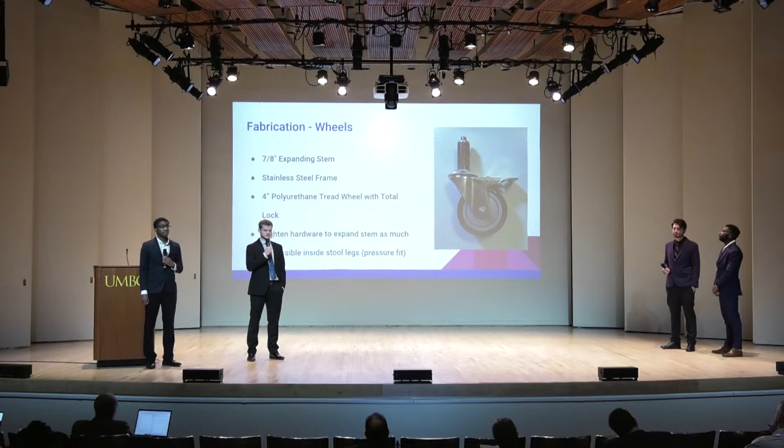The wheels of the stool are 7/8-inch expanding stem caster wheels. We chose to go with a stainless steel frame for its increased strength as well as its resistance to corrosion. The wheels are 4-inch polyurethane tread wheels to give it both indoor and outdoor capabilities, and they come with a total lock that allows the user to lock both the rotation and the swivel of the wheel. In order to attach the wheel, the expanding stem was placed directly into the open cut legs of the stool, and the interior hardware was tightened to expand the stem, this way pressure fitting it into the chair.

For the handle, we decided to use a foam-wrapped hard plastic handle with marine-grade polyester rope, and this provides a resilient handle which is comfortable to grip as well as being 29 inches in height from the ground to the handle. We attached the handle to the frame using rivets and washers in order to fasten the full diameter of the rope. And the handle allows the user to roll the stool comfortably without needing to bend over. Next slide.

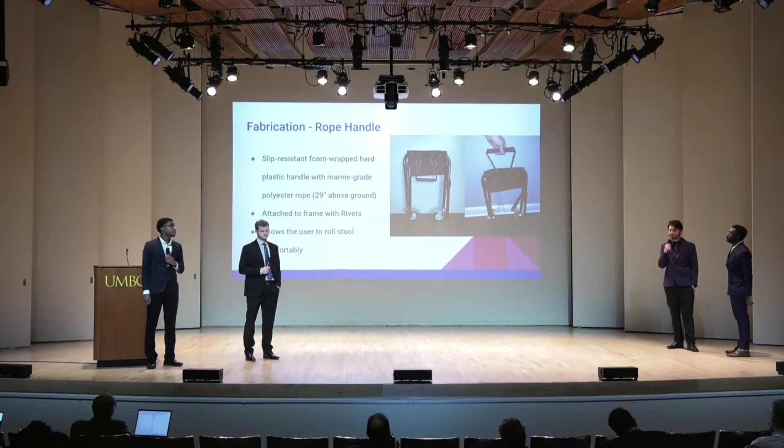The stool requires less than 5 seconds to unfold, which is well within our requirement of 20 seconds, which means that our client will be able to open the stool without issue, even when she's feeling lightheaded due to her POTS situation. The stool weighs approximately 8.2 pounds, which is under the 10-pound requirement that we had, which means that our client will be able to carry the stool without issue when rolling is inconvenient.

The stool is able to roll while folded, which means that our client will have plenty of maneuverability as well as the option to roll and carry the stool. Next.